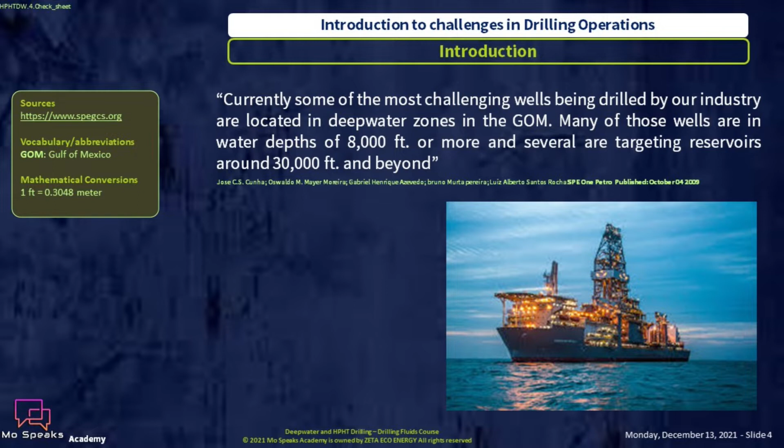The student will understand directly that water depth alone is challenging too, in the tools used in location, drilling hands, logistics and contingency plans, in addition to the targeted depth, which is another challenge to encounter.

Another citation that deserves mention is from SPE One Petro, published on the 24th of October 2017. Petrobras has also set a new Brazilian record for exploratory drilling by reaching a water depth of nearly 3,000 meters, breaking the record for the deepest exploratory oil well in Brazil, with a depth of 7,700 meters. The drilling was in the pre-salt region of the Espírito Santo Basin, 145 km off the coast, in an area known as Manai. The news was released by the company this Friday, the 10th of October 2021.

The number of wells being designed or proposed for drilling in difficult and challenging locations increases day by day. The normal and everyday skills of oilfield professionals should be upgraded to qualify them to face those challenges with the correct knowledge and transferred experience, to avoid a disastrous unprofessional attitude that represents a serious and life-threatening condition.

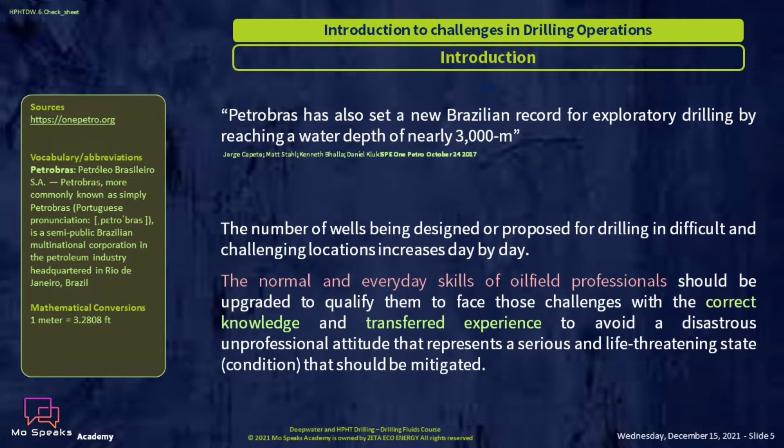That should be mitigated. The oilfield service hands, like drilling fluids engineers, cementers, casing installation and drilling engineers, geologists, mud loggers, even drilling crew, should have a certain degree of knowledge, adequate transferred experience, and technical awareness before assigning them to a challenging drilling project, like deepwater or HPHT wells.

For the first time, cementing and well control are among the top technical priorities that require adequate awareness in hot and highly pressurized zones.

Understanding the basics of drilling and drilling fluids is mandatory before attending this course, even though some might take it at their own pace of understanding.

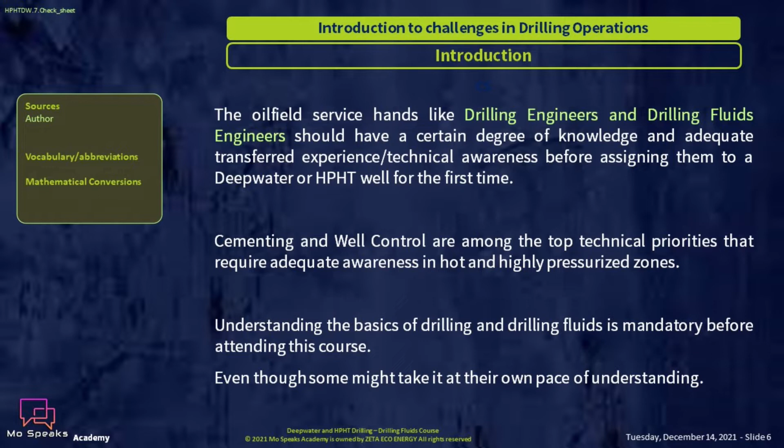Executing a challenging drilling operation project. One of the important questions that hasn't a definite answer is when to move forward with a challenging drilling project, for example, a deepwater drilling project.

The answer can be summarized in Square 1: economics - reservoirs with high flow rates and commercially thick drainable reserves. Then comes technology - accurate seismic and geological data confirm that this well is drillable with the current technology in our hands.

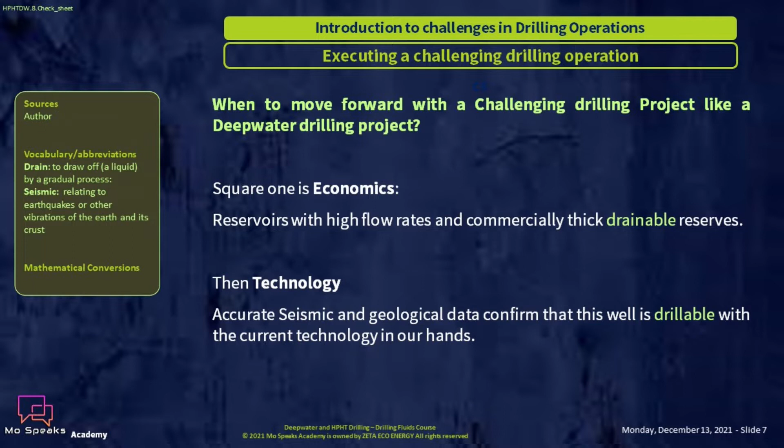The difference between conventional drilling operations and challenging drilling operations is the cost and difficulty. It is a common concept to seek cost reduction in those wells due to the substantially big investments needed to drill such projects. If funds are available and technology, crew, and safety are manageable, then comes the execution of the project.

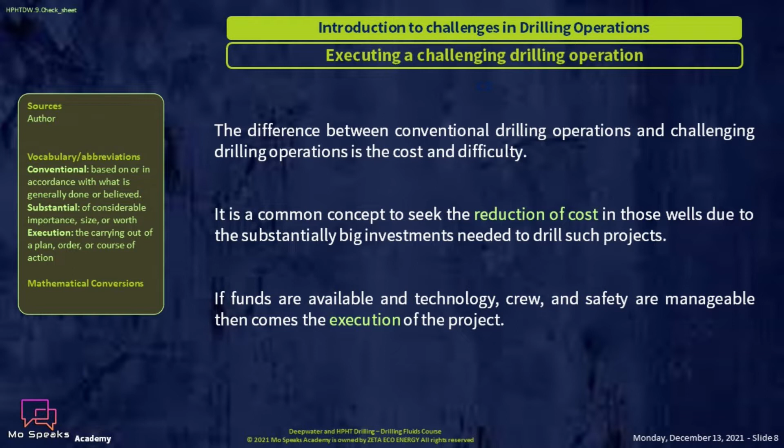In challenging drilling operations like deepwater drilling, the increase in water depth is the bar that increases gradually, from the 60s until deepwater technology reached a depth close to 11,500 feet, which is equal to 3,505.2 meters. It would be an act of negligence if we didn't consider the environmental impact of deepwater drilling.

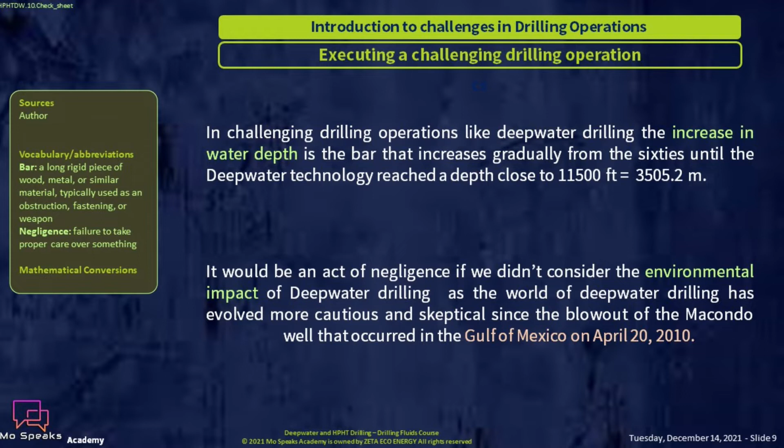The world of deepwater drilling has evolved to be more cautious and skeptical since the blowout of the Macondo well that occurred in the Gulf of Mexico on the 20th of April 2010. The Macondo incident, Gulf of Mexico, 20th of April 2010.

On April 20, 2010, the oil drilling rig Deepwater Horizon, operating in the Macondo prospect in the Gulf of Mexico, exploded and sank, resulting in the death of 11 workers on the Deepwater Horizon, and the largest spill of oil in the history of marine oil drilling operations.

4 million barrels of oil flowed from the damaged Macondo well over an 87-day period, before it was finally capped on July 15, 2010. On December 15, 2010, the United States filed a complaint in district court against BP Exploration and Production and several other defendants alleged to be responsible for the spill.

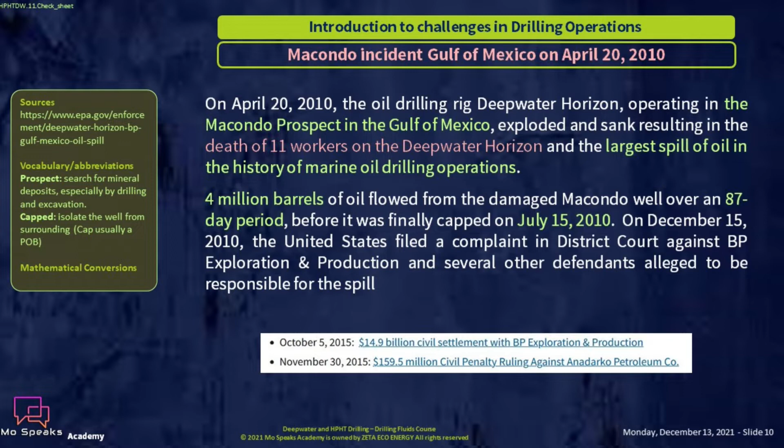The final findings by the committee are summarized in the following 7 points that are very interesting.

Finding 1: The flow of hydrocarbons that led to the blowout of the Macondo well began when drilling mud was displaced by seawater during the temporary abandonment process. Finding 2.1: The decision to proceed with displacement of the drilling mud by seawater was made despite a failure to demonstrate the integrity of the cement job, even after multiple negative pressure tests. This was but one of a series of questionable decisions in the days preceding the blowout that had the effect of reducing the margins of safety, and that evidenced a lack of safety-driven decision-making.

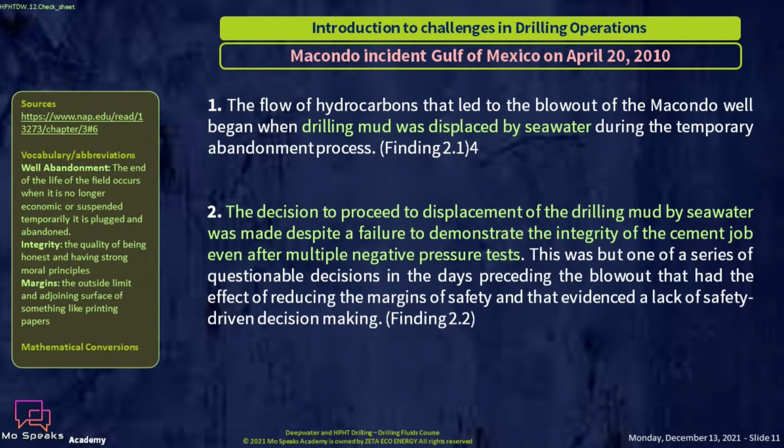Hi, this is GIF, Andromeda's assistant. She went for a break to check her neurons.

Let us continue with the committee findings. Finding 3: The reservoir formation, encompassing multiple zones of varying pore pressures and fracture gradients, posed significant challenges to isolation using casing and cement. The approach chosen for well completion failed to provide adequate margins of safety and led to multiple potential failure mechanisms. Finding 2.3.

Finding 4: The loss of well control was not noted until more than 50 minutes after hydrocarbon flow from the formation started, and attempts to regain control by using the BOP were unsuccessful. The blind shear ram failed to sever the drill pipe and seal the well properly, and the emergency disconnect system failed to separate the lower marine riser and the Deepwater Horizon from the well. Finding 3.1.

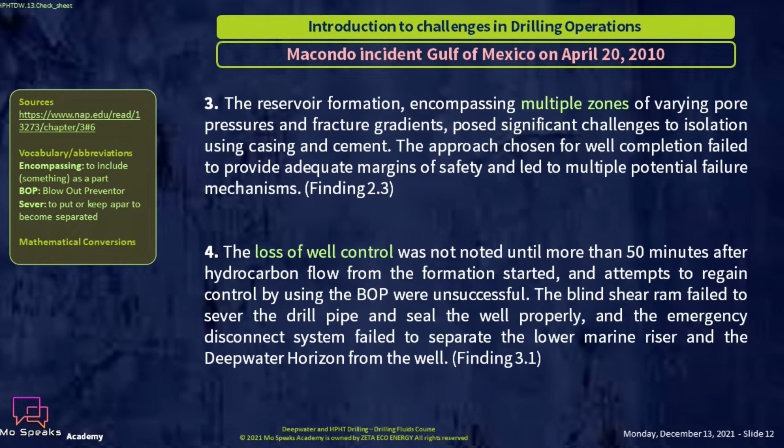Finding number 5 is very alarming and should raise awareness among professionals. The blowout preventer system was neither designed nor tested for the dynamic conditions that most likely existed at the time attempts were made to recapture well control. Furthermore, the design, test, operation, and maintenance of the blowout preventer system were not consistent with a high reliability, fail-safe device. Finding 3.16.

Finding 6: Once well control was lost, the large quantities of gaseous hydrocarbons released onto the Deepwater Horizon, exacerbated by low wind velocity and questionable venting selection, made ignition all but inevitable. Finding 4.1.

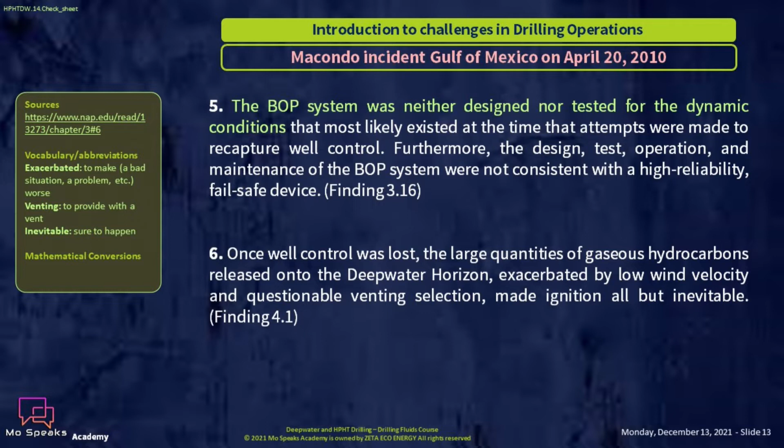Finding 7: The actions, policies, and procedures of the corporations involved did not provide an effective system safety approach, commensurate with the risks of the Macondo well. The lack of a strong safety culture, resulting from a deficient overall systems approach to safety, is evident in the multiple flawed decisions that led to the blowout. Industry management involved with the Macondo well Deepwater Horizon disaster failed to appreciate or plan for the safety challenges presented by the Macondo well. Finding 5.1.

Conclusion: This incident's causes and reasons will be a motive and inspiration for many active and inactive professionals in the oil and gas industry to reveal exactly what happened on that day, and this will take a long time to settle. This is a very well-made video on YouTube analyzing the incident, selected by Andromeda.

The CSB is an independent federal agency charged with investigating industrial chemical accidents. Headquartered in Washington, D.C., the agency's board members are appointed by the President and confirmed by the Senate.

April 20th, 2010: 11 workers died and 17 were seriously injured by an explosion on the Deepwater Horizon, an offshore drilling rig located approximately 50 miles off the coast of Louisiana. The rig burned for 2 days, eventually sinking and triggering the largest oil spill in U.S. history as oil and gas spewed up from the sea floor.

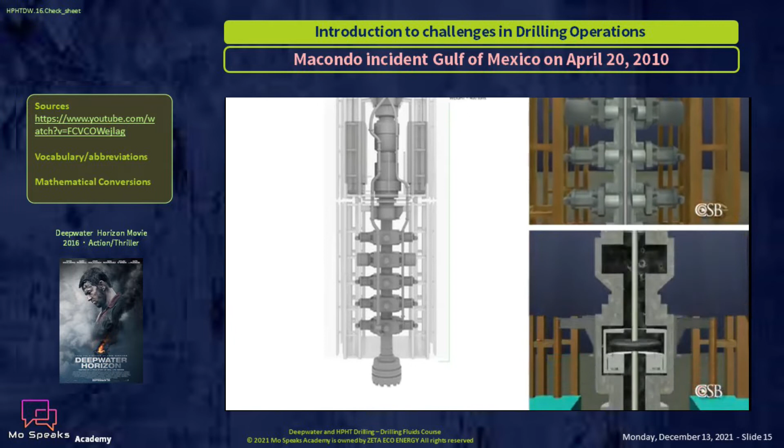In 2010, the CSB launched an investigation to examine the technical, organizational, and regulatory factors that contributed to the accident. During the investigation, the CSB made new findings about why a key piece of safety equipment, the Deepwater Horizon's blowout preventer, failed to seal the well during the emergency. These new findings help explain why the accident was so devastating, and the CSB cautioned that other blowout preventers currently in use could fail in similar ways.

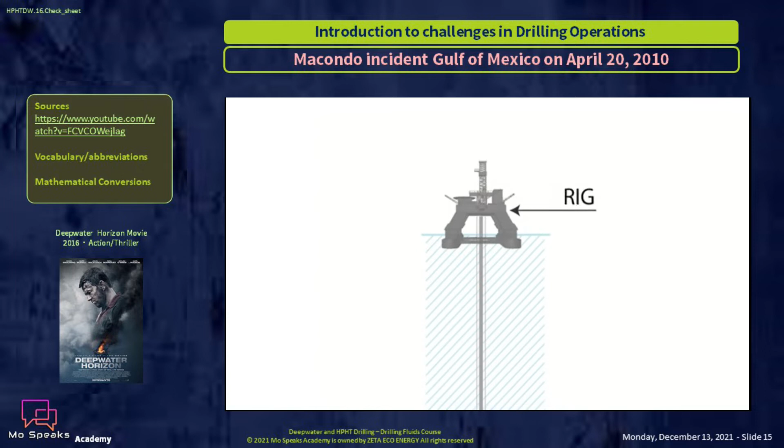Drilling an offshore well involves creating a pathway between the drilling rig and oil and gas reservoirs trapped beneath the sea floor. A deep hole, or well bore, is drilled through layers of subsea rock and sediment. These rocky layers can contain trapped water, crude oil, and natural gas under pressure. An unplanned flow of these well fluids into the wellbore, known in the industry as a kick, can be dangerous.

Without careful management, a kick can lead to a blowout, the uncontrolled release of flammable oil and gas from the well. A blowout can be catastrophic, since oil and gas reaching the drilling rig can quickly find an ignition source, leading to a fire or explosion, endangering the lives of the drilling crew. To prevent kicks, drillers pump a dense slurry called drilling mud into the well, creating a barrier between the undersea oil and gas and the piping that leads to the rig.

If this mud barrier fails or is somehow removed, the safety of the drilling crew depends on a critical piece of equipment located on the sea floor called the blowout preventer, or BOP. The BOP is a complex electrically and hydraulically powered device that is essential for controlling the well and, in an emergency situation, preventing a disaster on the platform high above on the sea surface.

The BOP is connected to the rig by a large diameter pipe called a riser. If a kick occurs, the blowout preventer is designed to prevent flammable oil and gas from traveling up the riser to the drilling rig. This is done by sealing the area around the drill pipe, known as the annular space.

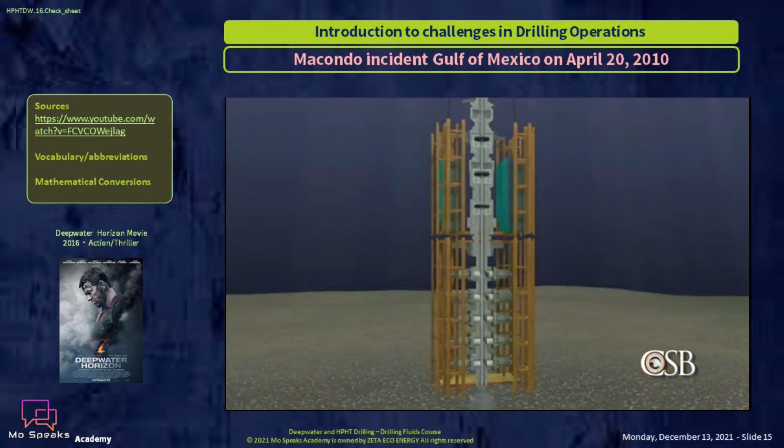To do this, the crew can manually close pipe rams and donut-shaped rubber devices known as annular preventers. If those devices should fail to work, the last resort is a pair of sharp metal blades which form a blind shear ram designed to cut the drill pipe and seal the well. The blind shear ram can be activated manually or by automated emergency systems.

At approximately 8:45 p.m. on April 20th, 2010, a kick occurred in the Macondo well. Oil and gas entered the well bore undetected, eventually passing above the blowout preventer and traveling quickly up the riser toward the Deepwater Horizon and the 126 people on board.

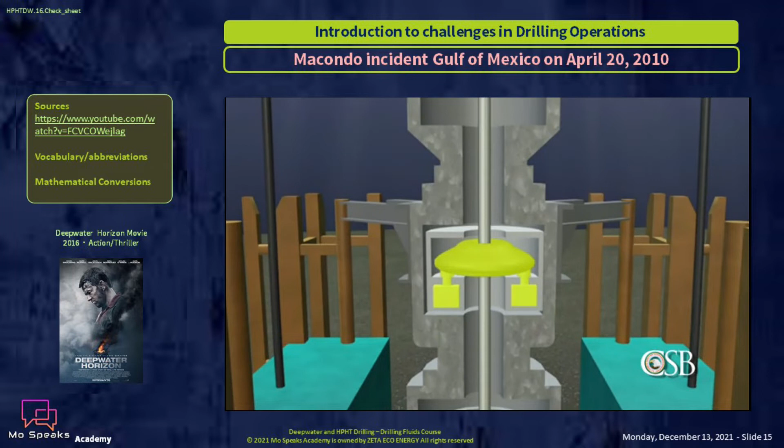Just after 9:40 p.m., drilling mud, forced upwards by the rising oil and gas, suddenly blew out onto the rig. Crew members responded by closing the upper annular preventer in the BOP. However, this did not seal the well as intended, and flammable oil and gas continued to flow into the riser toward the rig. Next, the crew closed a pipe ram.

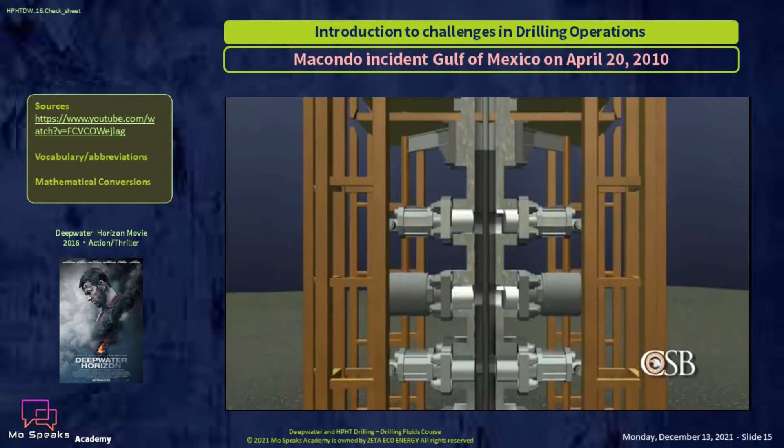This successfully closed the annular space and sealed the well, but tragically this proved to be only a temporary fix. Oil and gas that were already above the pipe ram continued to flow inexorably toward the Deepwater Horizon.

As the oil and gas escaped the riser onto the rig, the pressure dropped in the annular space above the pipe ram. But at the same time, the pressure in the drill pipe climbed substantially. The drill pipe was closed at the top, but oil and gas continued to flow in from the reservoir below.

After extensive analysis, the CSB concluded that this large difference in pressure likely caused the drill pipe to buckle, essentially bending the pipe off-center inside the blowout preventer. The buckling pushed sections of the drill pipe outside of the reach of the blind shear ram blades. This would eventually prove to be catastrophic.

At approximately 9:49 p.m., the flammable hydrocarbons found an ignition source, and the first explosions shook the Deepwater Horizon.

With the drill pipe buckled, the explosion and subsequent loss of electrical and hydraulic power from the rig likely activated an automated system on the blowout preventer known as the AMF deadman, which closes the blind shear ram and cuts the drill pipe. This emergency system is designed to activate when electric power, hydraulic pressure, and communications from the rig have been lost. The AMF deadman system was operated by two redundant control systems on the BOP, known as the yellow pod and the blue pod.

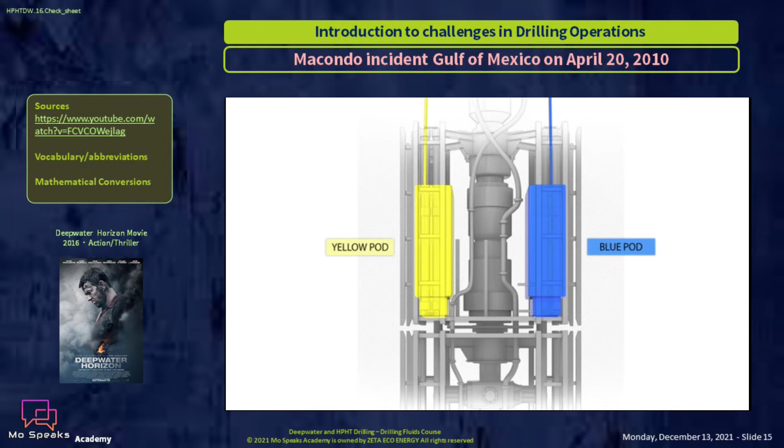The redundancy is supposed to increase the reliability of the system in an emergency situation. The yellow and blue pods worked independently of each other and were comprised of identical enclosed computer systems and sets of solenoid valves. When activated, the solenoid valves controlled important BOP functions, such as closing the blind shear ram.

If electrical power from the rig was lost, as happened on April 20, 2010, both the yellow and blue control pods contained backup 27-volt and 9-volt batteries to power emergency functions. The 9-volt batteries powered computers that would activate the solenoid valves, which were powered by the 27-volt batteries.

However, evidence indicates the blue pod had been miswired at some time before the BOP was lowered onto the seafloor. This caused the pod's 27-volt battery to drain and made it impossible to operate the solenoid valve for the blind shear ram on the night of the accident.

And within the redundant yellow pod, the solenoid for the blind shear ram had been miswired. The solenoid valves were controlled by two coils of electrical wire. These two coils were designed to work in concert, generating a magnetic field strong enough to operate the valve. But within the miswired solenoid valve, the two coils actually opposed each other, leaving the valve paralyzed.

Only a third unplanned failure allowed the yellow pod to operate. On the night of the accident, one of the 9-volt batteries that powered the solenoid valve's computer had failed. As a result, the affected computer system could not initiate the command to energize the miswired coil.

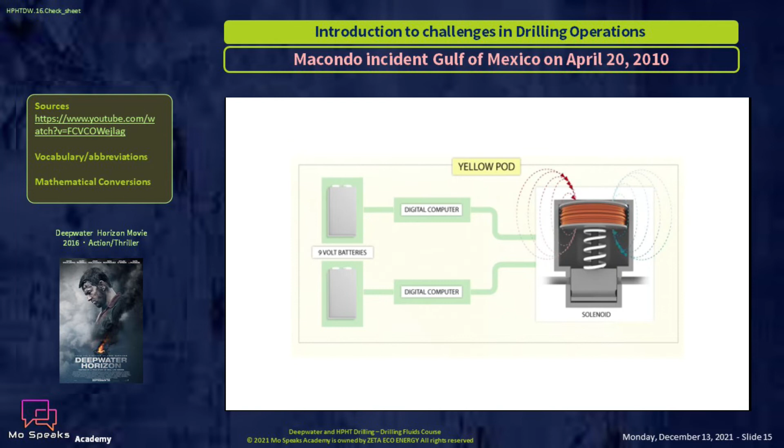Had both coils of the miswired solenoid valve been energized, the two coils would have generated opposing forces on the valve. The solenoid valve would have remained closed, and the blind shear ram would never have been closed. However, the failed battery rendered one coil inoperable, and most likely allowed the other coil to open the solenoid valve by itself. This in turn initiated closure of the blind shear ram.

This should have cut the drill pipe and sealed the well, greatly reducing the impact of the accident. But because the drill pipe was buckled and off-center inside the blowout preventer, it was trapped and only partially cut. With the failure of this last-ditch measure, there was nothing left to stop the massive oil spill and the destruction of the rig.

During its investigation, the CSB identified a mechanism that likely caused the drill pipe to be buckled around the time of the explosion. This mechanism is called effective compression. Although effective compression had previously been noted as a hazard in other drilling operations, it had never been identified as a problem affecting drill pipe during well operations. Effective compression occurs because although pipe may appear to be perfectly straight, in fact it has minute bends and irregularities, invisible to the naked eye.

Along these bends, the side of the pipe that is curved outward is slightly longer and has more surface area than the other side. When there is a large difference in pressure between the inside and outside of the pipe, as happened on April 20, 2010, the longer side of the pipe experiences a larger bending force. Eventually, this force can become great enough to buckle even heavy pipe.

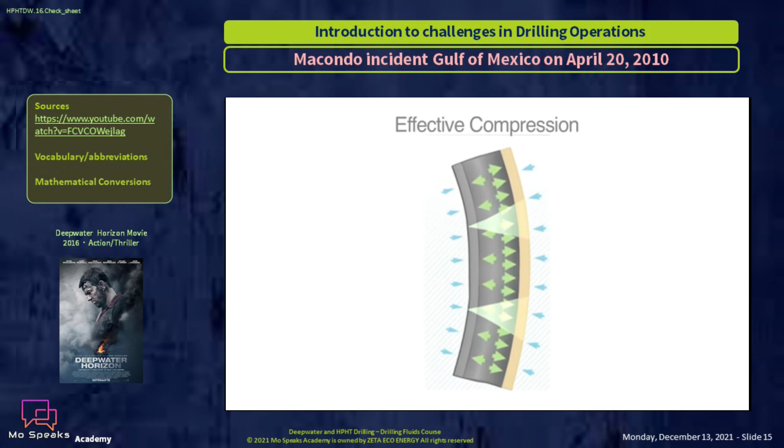This is an important finding, CSB investigators said, because the same conditions of differential pressure could occur at other drilling rigs, even if a crew successfully shuts in a well. The CSB warned this could make existing blowout preventer designs less effective in emergency situations.

In the case of the Deepwater Horizon accident, the buckled drill pipe prevented the blind shear ram from sealing the well. Oil and gas from the well flowed out of the buckled drill pipe and into the Gulf of Mexico for 87 days. A reported 5 million barrels of oil eventually spilled, causing one of the worst environmental disasters in United States history.

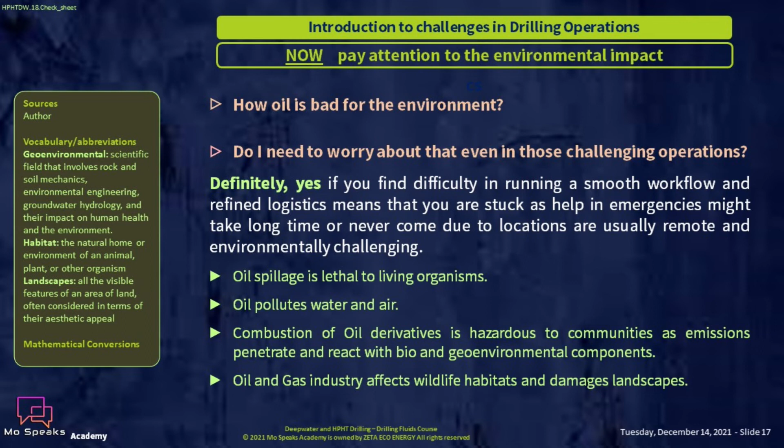The adverse effect of oil on the ecosystem is visible. Oil spillage is lethal to living organisms. Oil pollutes water and air. Combustion of oil derivatives is hazardous to communities as emissions penetrate and react with bio and geo-environmental components. The oil and gas industry affects wildlife habitats and damages landscapes.

A closer look at technical challenges. Water depth is not the only obstacle in challenging drilling operations, but the temperature and pressure of the formations to drill is another challenge professionals need to pass through in the game. Hot temperature and elevated pressure in challenging projects can grow in difficulty in ultra HPHT and extreme HPHT conditions.

Geomechanical stability referring to seafloor and wellbore is another challenge that can affect the progress of the whole project. Harsh climate and topography are another game changer in project degree of difficulty. Drilling tools and drilling rig capacity and durability during challenging operations can shift the whole project between demise or success. The degree of crew training and safety awareness is a project saver.

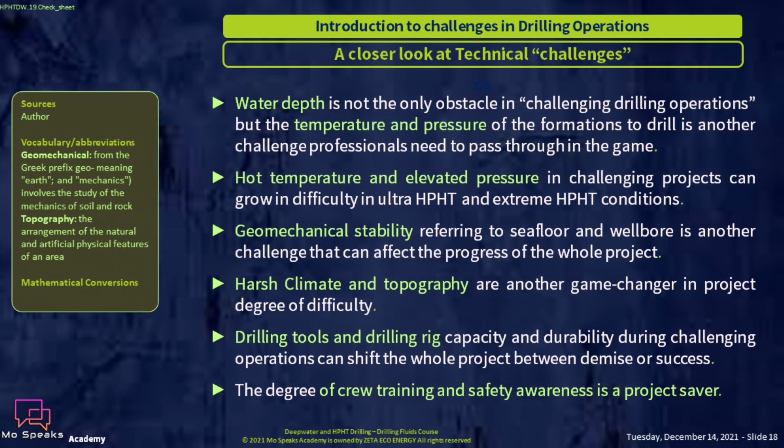More challenges will be revealed during the course. We can visualize them in the following list. Location remoteness from nearest base or harbor. Logistics and workflow. Drilling window and equivalent circulating density and narrow drilling window. Circulated drilling fluid volume. Supercharging, ballooning of formation.

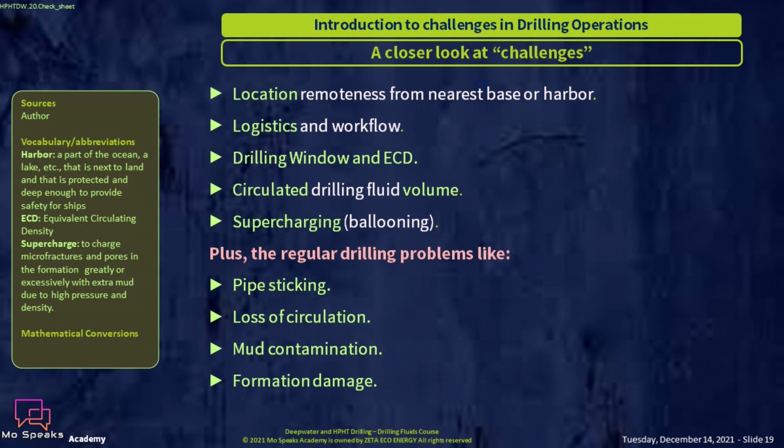Plus, the regular drilling problems like pipe sticking, loss of circulation, mud contamination, formation damage, hole cleaning difficulties, acid gases' detrimental effect on fluids and metal components, H2S bearing zones and fatality concerns, shallow gas zones, well control issues, surge and swab pressures, fluid compressibility, thermal expansion of fluids and components, gas solubility, barite sagging. During the course, we shall go through those listed challenges one by one and comprehensively.